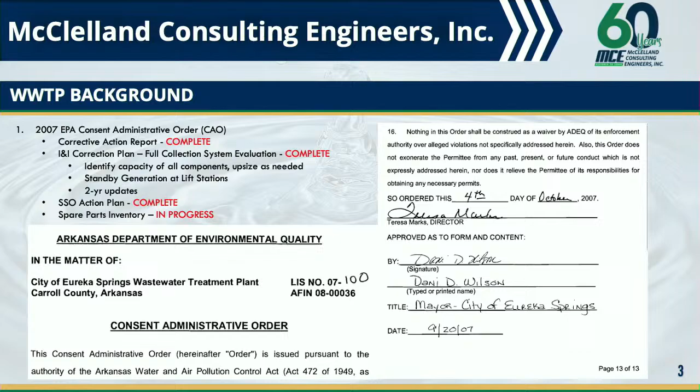So just a brief bit of background to tell the story of this screenings and grit equipment. All the way back in 2007, when the plant was put under consent order, there was a series of things that needed to be completed. All except for complete spare parts inventory were complete, or that may have been complete previously, but is currently now back in progress. There's been some work that had to be done to get that to happen.

That included an expansion of the plant in approximately 2011, 2012. The design was from a few years earlier, but with that expansion, they did not construct what was an originally planned new piece of equipment for screenings and grit removal, and in fact a storage basin for sludge, which is one of the byproducts of the treatment process that we have to deal with.

So right now we're having to waste directly to the belt filter press, which does not allow any basically any slack in the routine and the staffing for the plant.

That presumably was because of both budget and the fact that at that time the screening equipment was functional, it was working. So then the original 2007 consent order was lifted, and the following year the screening equipment began to fail.

The equipment manufacturer, Lakeside, came to the site in February of 2016 and performed a comprehensive evaluation of the equipment, and they determined that basically full replacement was necessary. At the time, my understanding is that was deemed incredibly too expensive, on the order of $500,000.

So time went on. Today, or if we had gone out for our tour, these are some of the pictures that you might see of the aging equipment. This is very common for equipment at a wastewater treatment plant that is 20 plus years old, including cracking at concrete structures and just general debris and residue.

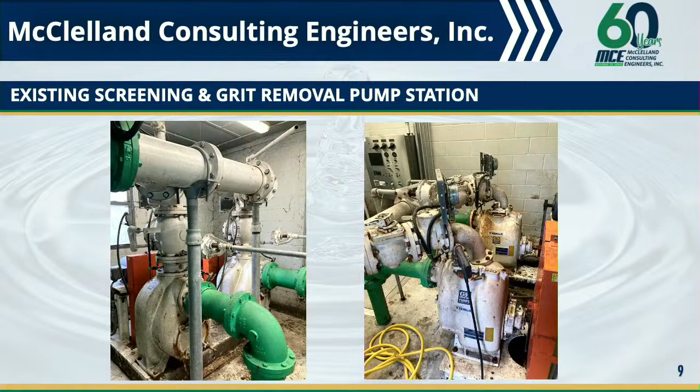So after the equipment started to fail, buildup and residue proceeded. That piece of equipment is serviced by this pump station, which in the previous proposed design to replace the screenings and grit equipment, this lift station would have been eliminated, which would mean fewer pieces of equipment to maintain and less money to run pumps.

So that's one of the things that we've been trying to look at, is it still possible to do this equipment replacement and also eliminate a lift station on site that costs money to operate and maintain?

So then we fast forward to 2021, and the EPA enters again, and they engage with their Circuit Rider Assistance Program, and they have noted that the facility is an SNCC, a significant non-compliant entity. So you guys are on their naughty list.

It's not a good place to be. Basically, the more time we take to fix the problem, the more effort that both McClelland and staff, and subsequently y'all, will have to make to convince them that you're taking appropriate actions, putting in planning and long-term funding to make sure that these things don't keep happening.

So that rider program also had a series of recommendations, many of which are still in progress.

And so most recently, what we believe has been a part of what is the new attention on the plant is that after the Circuit Rider program was finalized, which was during still the beginning of the COVID period, the EPA probably thought that they didn't need to worry about y'all as much.

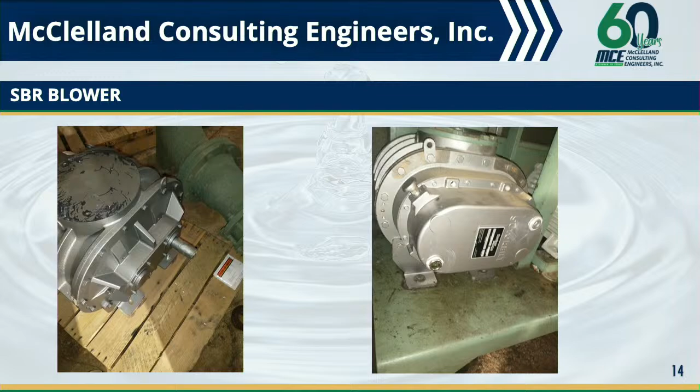And then here is the spare repaired blower. And so incrementally, we are addressing all of the EPA and the DEQ's needs, but we're having to do that in a responsive way rather than in a proactive way.

A few other things going on right now: the plant is in the middle of applying for your new NPDES discharge permit, which is your federal permit to operate the plant and discharge into the creek. Based on other new permits from other communities, it's very unclear whether there are going to be more stringent limits on what the treatment plant is required to maintain. An example would be ultra-low phosphorus.

Right now, you are only required to meet a limit of 1 milligram per liter phosphorus. Other communities that have been brought to 0.5 have had to make major investments to make that transition from 1 to 0.5. That could include new basins, filters, or significantly more chemical treatment.

Mr. McClung: Are they likely to make us do that? Right now, my gut would say no, because we haven't heard anything from them about it. They often, when they want to make that big of a change, they'll start telling us, but it is unclear.

If it's unclear, it's just like the health department has been with septic systems in the past. One year they want it this way, and the next year they want it that way. I don't want to be a victim of that. If we're going to do it, then we better do it with the future in mind, so they don't slap something on us.

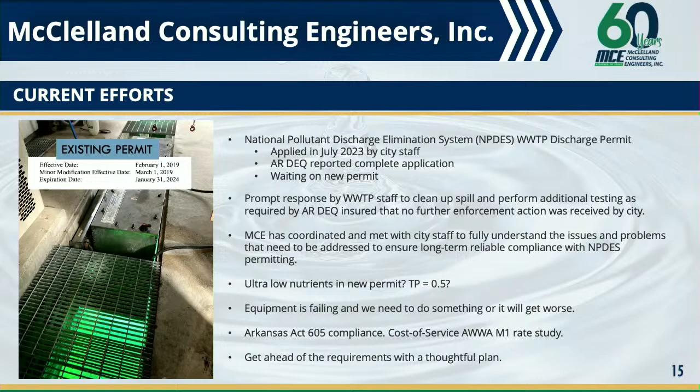The good news: we think that you are in a perfect position based on the regulatory involvement. And what that does is it actually makes you more eligible for federal financing. Right now, as we've learned with many other clients, federal loans are one of the most attainable and low interest forms of financing for capital improvements.

We recently had a client that received a $32 million promise in loans for 4%. So, we'll talk more about that in a later slide.

The SBR we think is okay. So that's a big deal, because it could be exponentially more expensive if we had to deal with the heart of the biological treatment process. With having this opportunity to pick and choose where we really need to do the work, we think we can keep this within the budget that we're going to propose to you.

One of the particular things we're excited about is creating some room on site for the contractor, which could be getting rid of these old structures that have not been in service for years and are actually somewhat of a liability.

How big are they? Since we didn't have the tour... Oh yeah, so one of them, the old trickling filter, is like 30 feet tall and about 30 feet in diameter, or maybe it's 40 feet tall actually with its foundation base. It's a big structure, and it has quite a nice footprint—when we toured with some contractors, they were looking around like, where are we going to do this work? So that was one of the answers.

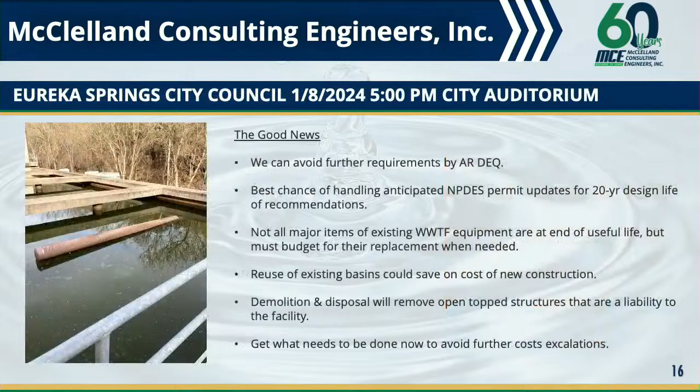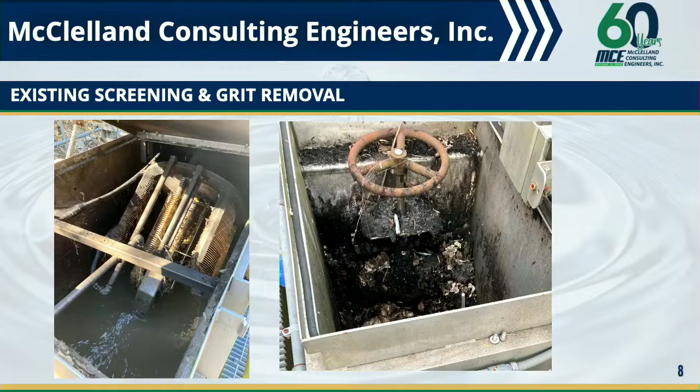Good question. And to the point of us having to cancel our tour today, I know that Simon, Terry, or I would be more than happy to take any of you guys down to the plant and look around and see some of what we're talking about, especially as we get closer to actually doing some construction. I think that'd be really helpful for everybody.

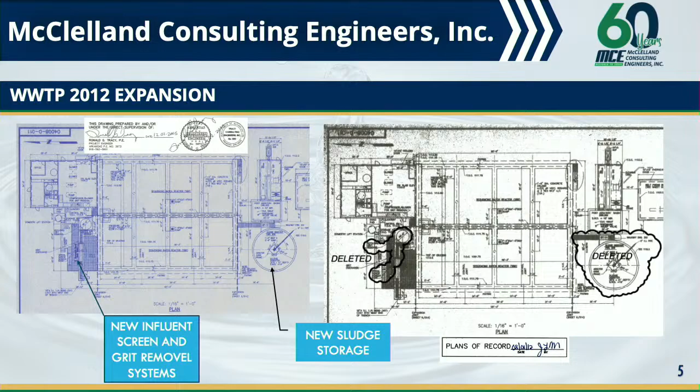Nick here is my direct supervisor, and he's been my leader for 5 years, and I wouldn't be in water wastewater if it weren't for him. I would be off designing a park or something, but this is my passion. I grew up out of school working with another local engineering firm that specializes in water and wastewater, and I did that for 14 years before thinking I was going to maybe design parks, and I didn't really like that. So I'm glad to be back here, glad to be with McClelland.

A couple other engineers that will likely work on this project are Mr. Shannon Jones, who's a recent addition to our team. He comes to us with 25 plus years of experience. And then Spencer Briggs, who's our newest engineering intern, has probably spent as much or more time at the site with Terry than I have, helping me gather information and take pictures and stuff like that. Spencer couldn't be here today because he's on vacation.

Lucky him. Real quick, we are doing other work in this community. We really love coming here. We all vacation here. We all love different aspects of it. We have people who love coming downtown, people who love going on the mountain bike trails. I like getting out on the lake, personally.

But we've helped you guys with the storm drainage tunnel down Main Street. We're currently working with some private citizens on some issues with that. We've helped you guys with water line improvements, and we've helped you with sewer improvements, obviously. We would like to continue that relationship.

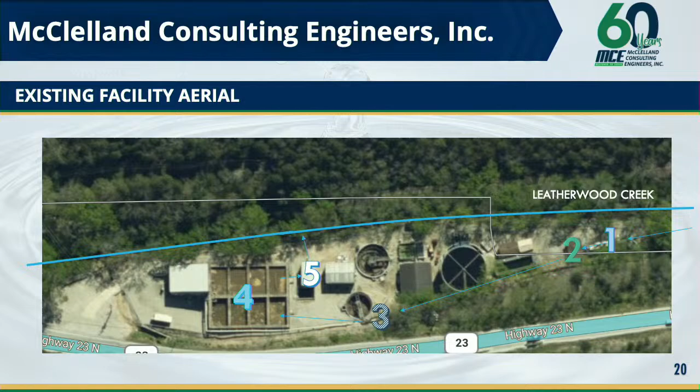So as we try to deal with that limit, that's where we're using a lot of chemicals. Leatherwood Creek, where we discharge, does have an impairment classification in the Arkansas 303D list for dissolved oxygen, but that does not occur until some distance downstream. So it would seem that the plant's dissolved oxygen effluent is actually probably helping that situation a little bit, but definitely not hurting it.

Real quick, we took a basic look at your flows over the past year. DEQ always likes for you to be having a plan of a capacity expansion if you're bumping up to 80% of your permitted flow rate. Your permitted flow rate is 0.9 million gallons, or 900,000 gallons a day. You are not within 80% of that, or up to the 0.72 million gallons per day yet. You're sitting at about 0.45 or 0.5 million gallons per day average.

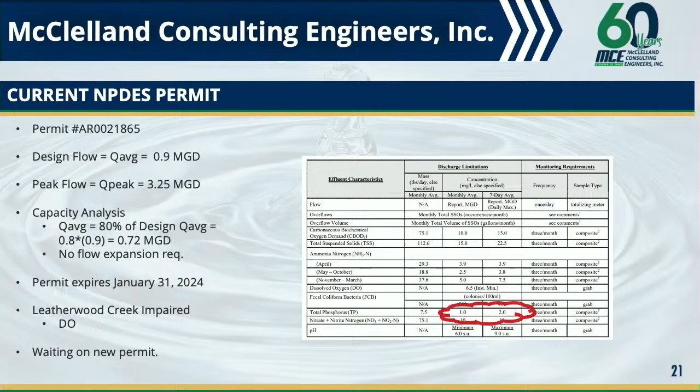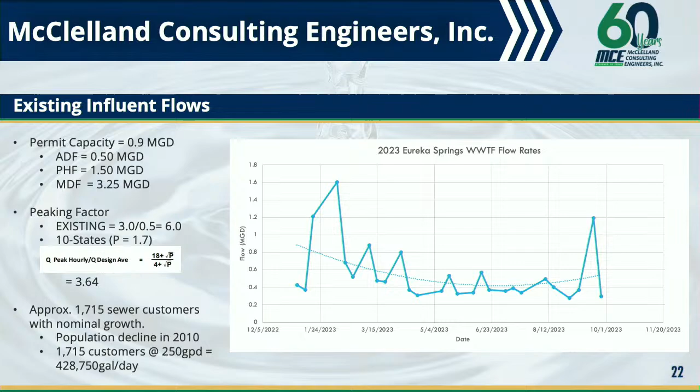The design flow, if we were to try to come at you and be proposing a brand new plant, actually aligns well with your average daily flow, so that's good.

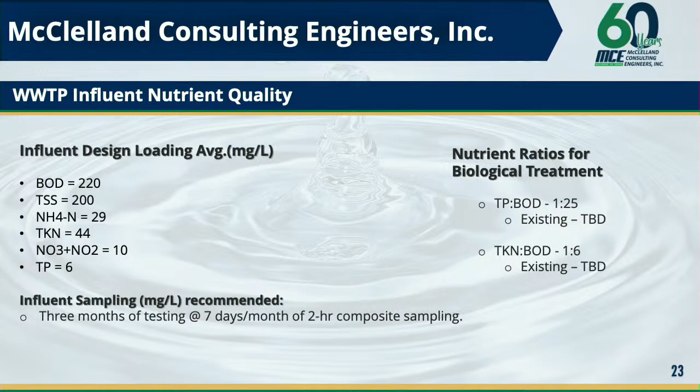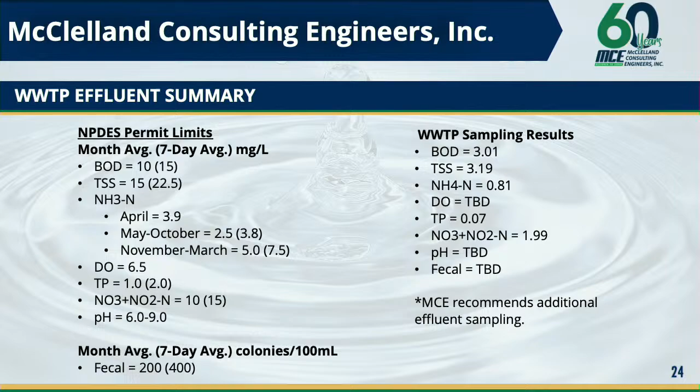So, what do we think needs to be done? There is sort of a minimum and additional, but the problem is it's unclear right at this moment exactly how much the minimum is going to cost. And so that's part of how we've developed the budget we've developed that we'll show you in just a minute.

But basically, we think we need to repair the grit and screenings equipment, repair, replace. And then we need to provide the plant staff with proper aerated sludge storage, which would allow them some flexibility during the peak seasons of sludge production. And then providing DEQ with the standard operating procedures and basically proof of a stocked spare parts - that's kind of a non-negotiable.

To do that, cleaning the units, especially the SBRs, of the rocks and debris that we talked about, and then creating some of the space for the contractor to perform this work on site by demolition of abandoned structures - we believe is part of the minimum to just get this done, stay in compliance, keep DEQ happy.

The additional recommendations start to become the things that are significantly less expensive to ask a contractor to do when they are already on site. And so these are things that may or may not be critically necessary, but could become critically necessary at any moment. It's unclear, for instance, when the belt filter press bearings will go out.

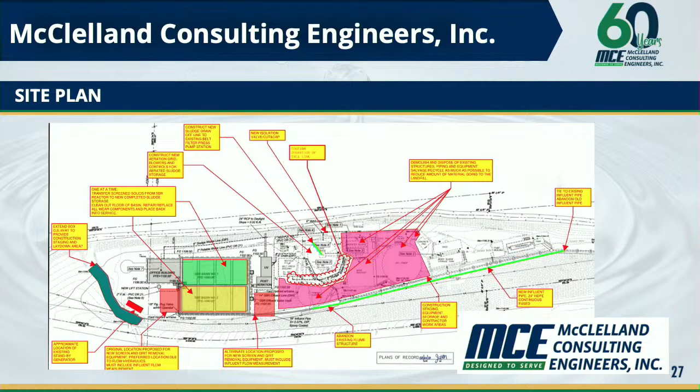And then the yellow and the green are the two existing reactors that we've talked about cleaning out. There's other miscellaneous work there, but we can get into the details at any time if you guys would see fit.

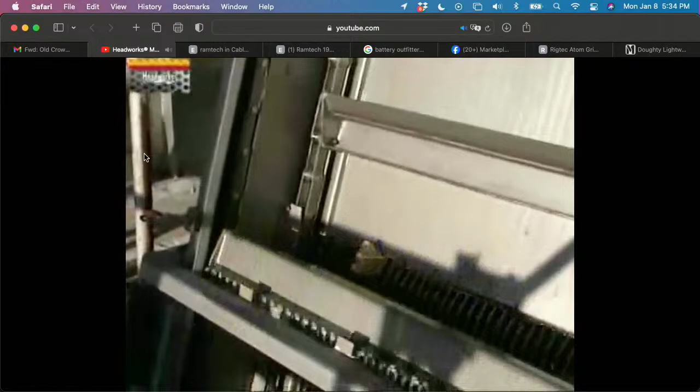The screen equipment that you have has some amount of... What's started again? No, this is exactly where I want it to be.

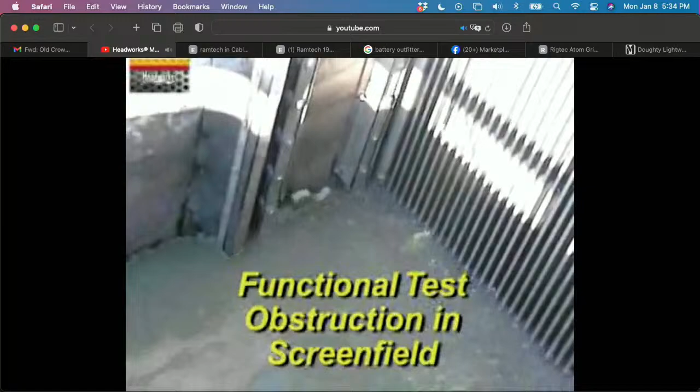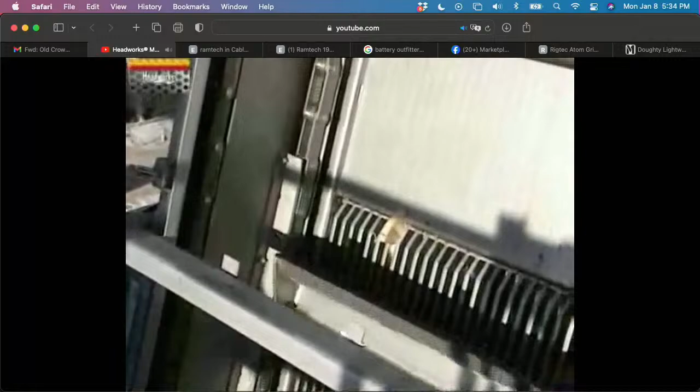So there's a little piece of wood that's underneath that screen, and actually right now it's in its reverse function. Looks kind of funny going down. But basically, the only thing down in the screen is that little cog and that bottom screen, and then it is lifting this stuff out, and it won't break itself. It stops, it moves around. And here in a second, it's going to eventually clear itself, and it's going to bring that piece of wood out.

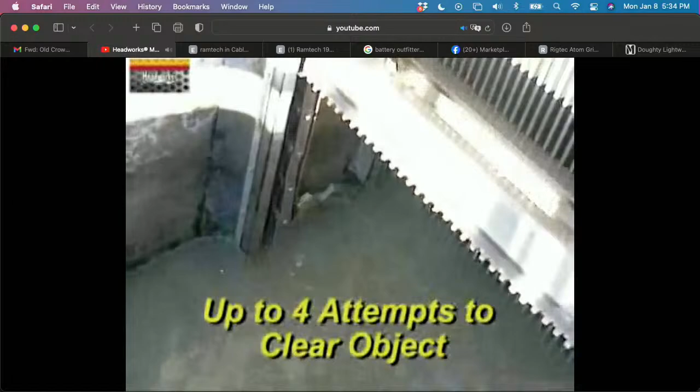There's a handful of manufacturers that make this type of equipment this robust. And one of the things that we believe is advantageous is that it gives a contractor some options. We're not going to be sole sourcing with one entity that's going to take advantage of that opportunity to increase the price.

However, even though this system is as robust as we're pointing out, we still think we need two. The idea there is because of the realities of life—if you only put in one, it's very unlikely, but there's a chance that as soon as you put it in, it's going to break.

Oh gosh, I'm going to need help pulling the presentation back up. I'm so sorry. Oh, do I just start PowerPoint again? How do I do that?

Same principle as the rest of it, like pumps. You want to put a second one in because if the first one fails, then that's a no-brainer.

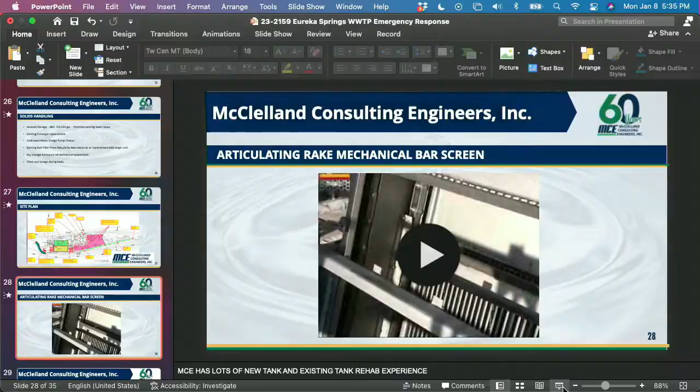Exactly. And the other thing is nothing is going to get everything out of the channel. So by splitting the flow into two channels, even in the middle of flow you could hypothetically isolate one—we would provide gates or valves for that—and you could get in there and do something while still having flow going.

One of the biggest challenges we've been trying to figure out about the existing screening installation is how do you fix it and keep it in service at the same time? Well, you don't—you have to either bypass around it, meaning we're telling DEQ we're not screening or removing grit at all, which they don't like, or put in temporary equipment, which costs money. So part of what we believe will be the contractor's preference is to leave the existing equipment in service as best it can while we build new at one of these other locations.

Just a quick question—so the video you showed versus what's actually happening at our plant, what's the difference? Is all this stuff just being jammed into what's left and having to be removed manually, or what's going on? What's really happening is the majority of it is getting past the unit because it has already filled up, and it's getting into the pipe, then into the pumps, then into the basins—destroying other equipment along the way, and filling the basins up, reducing the volume of treatment. Yeah, that's correct.

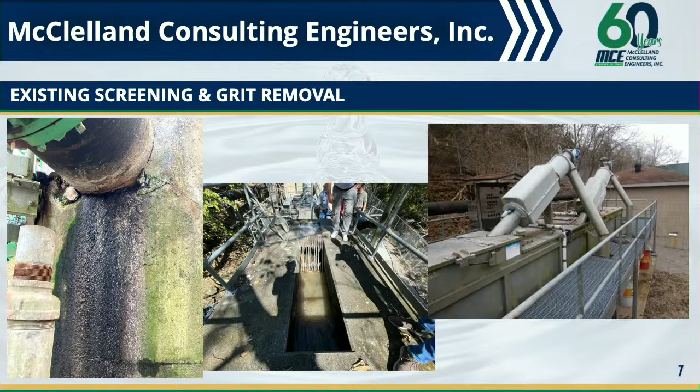And I did flash that up—nobody had a heart attack, so put it back up here.

Big numbers—these are budget numbers. What we call budget numbers are numbers we don't ever want to have to tell you are going to get bigger. We hope we can bring this down. We believe that with a construction manager or contractor entity involved is one of the best ways to bring that cost down. Time is against us—in the past 5 years, this project right here got twice as expensive, and I couldn't do anything about it. I can't tell you that's going to happen again, but I don't think it's going to go down in the next 5 years.

What do you typically feel is necessary for overage at this point in time? Is it 10%, 20%? 25% for contingency, construction contingency is what I'm calling that. And what I hope that could mean...

77.5 million there. Well, that's included, sir. I have included $1 million plus of contingency in this budget. In here? Yes, sir, it's at the very bottom. No, I don't see it. There, yeah.

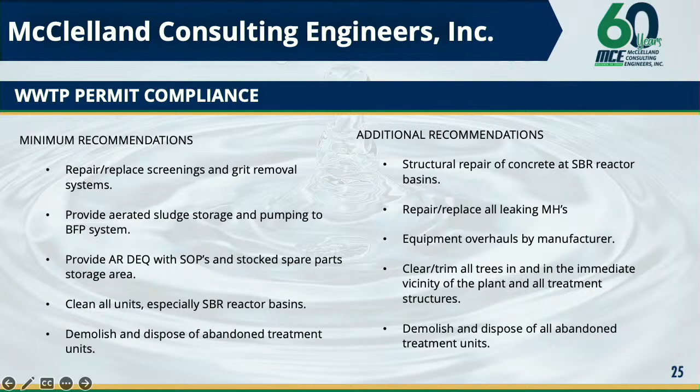But the other thing is the structural repair of the SBR basin. There's some pretty major cracking that we don't fully understand yet. It's not like pouring wastewater on the ground, but it's something they want us to look at. And so I brought my structural engineer on site, he wants to look at it some more.

Next page for the solids handling, this is the one that's probably more pertinent to your question. In my budget on slide 26 is the aerated sludge storage, which would be conversion of an existing basin. It is the existing conveyor replacement, it is the dedicated waste sludge pump station, but it does not include the existing belt filter press rebuild or replacement. It does not include the dry storage enclosure.

So will these, yes sir, will your 25% contingency cover that? Maybe, I would like to get a contractor involved, but maybe not. So I'm really good at pricing, but it's because I don't make too many promises. So there we're going to look at what, I mean just ballpark another 25%?

To me, if we can get a couple of these things and come in under 6 million, that's what we would be showing the community that we're being good stewards. I don't want to just, if we save $500,000 but then we have to add $1 million to get that other stuff, I'm not sure if that's really where we want to go.

Here's the thing, in my mind, it's one thing to be good stewards, but the good steward is the one that's looking at 50 years down the road. Maybe we can't project that far out for this kind of thing, but 20, 25 years, that's what we got to look at. It's never had that, and it's time.

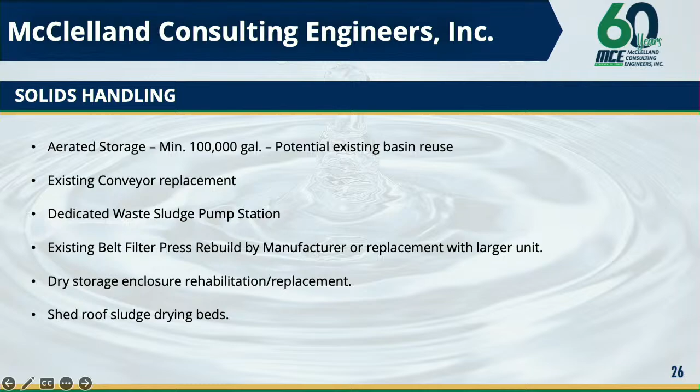Did I answer your question? Thank you.

What's the time frame for getting that? Are we already too late? Right now there is no pending free funds unless we could find a way to qualify for emerging contaminants, which we don't. How far away are we from being in a position to apply for that?

We have applications with Simon. So one of the things we were going to ask you all for today is approval to apply. It requires the mayor to have signatory authority, so y'all have to give him that authority to sign the application documents. Those are ready to go. That application process typically takes about 3 months for us to hear back about available loans. The prospects are very good right now for this project being able to be fully funded by federal loans.

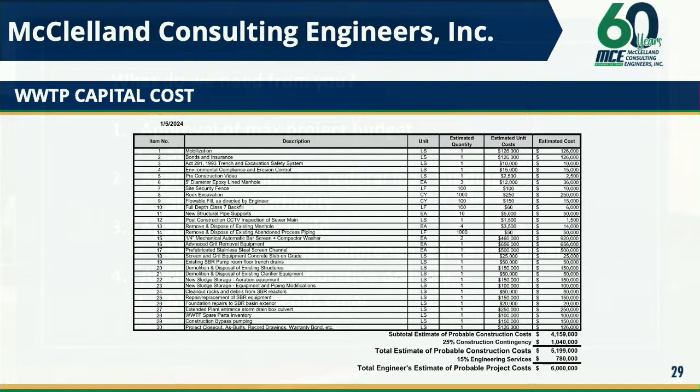We've got a little bit of money that we can work with to get some of this stuff going, through our I&I. That's what it's for. Yeah.

I think that can carry us over till that's the big thing, is we got to get after the cash. Yes, and it's actually the one thing that didn't make it onto my slide here, but it was already on Simon's budget for the year to do the utility study.

The proposal that we've received appears that both water and sewer are going to actually be able to be afforded for basically half of the price that he budgeted to do both. So that's really good news, and that's a little bit of money that gets freed up to do something else.

But the other items that we've listed here, we believe are really the path forward that begins this relationship where I'm going to get to come hang out with y'all once a month for the foreseeable future. And we're going to give you updates on how we're going to try to bring that $6 million budget down.

We're going to give you updates on the application for federal funding and what that looks like, and any updates on grant forgiveness. You follow through with that. Yes, sir.

I like that. And then again, I think we would like your input, buy-in on the choice to build new rather than repair the old equipment, which again, we believe is a near cost wash.

Sure. And then the last thing we haven't talked as much about, but I mentioned it a couple times. Typically, when you guys hire us, we complete design, which takes time. Then we put it out to bid for public. They look at it for a month. Then we find out how much they're going to want to build it.